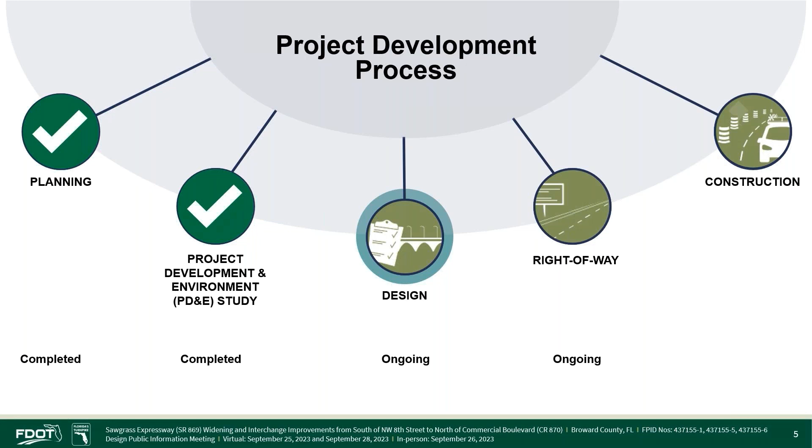The planning and the PD&E phases of the project have been completed, and the project is currently in the design phase. The design phase is when the construction plans and cost estimates to build a project are developed. The design phase is followed by right-of-way acquisition and construction. Right-of-way acquisition activities started in the first quarter of 2023 and are ongoing. Construction is tentatively expected to start in the first quarter of 2025.

This project, located from south of Northwest 8th Street to north of Commercial Boulevard, is adding capacity to meet future transportation demand and to improve safety. The project covers approximately 8 miles of the Sawgrass Expressway main line and includes 3 segments: Northwest 8th Street to Sunrise Boulevard, Sunrise Boulevard to Oakland Park Boulevard, and Oakland Park Boulevard to Commercial Boulevard.

Key improvements include widening from 6 to 10 lanes, interchange improvements at Sunrise Boulevard (County Road 838), Pat Salerno Drive, Oakland Park Boulevard (County Road 816), Commercial Boulevard (County Road 870), and a new interchange at Northwest 8th Street.

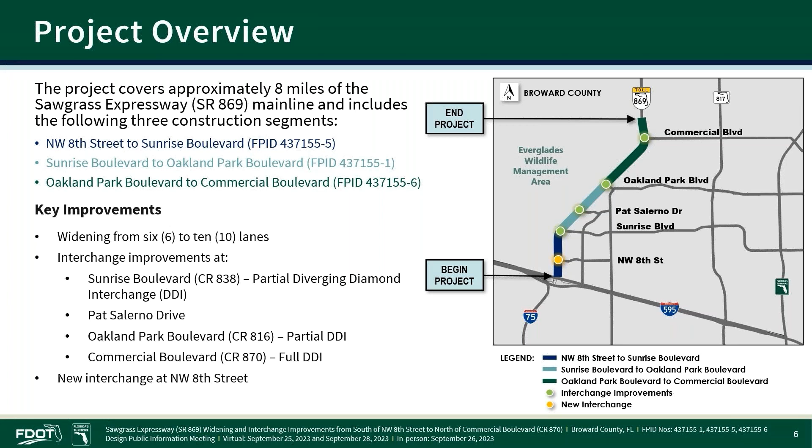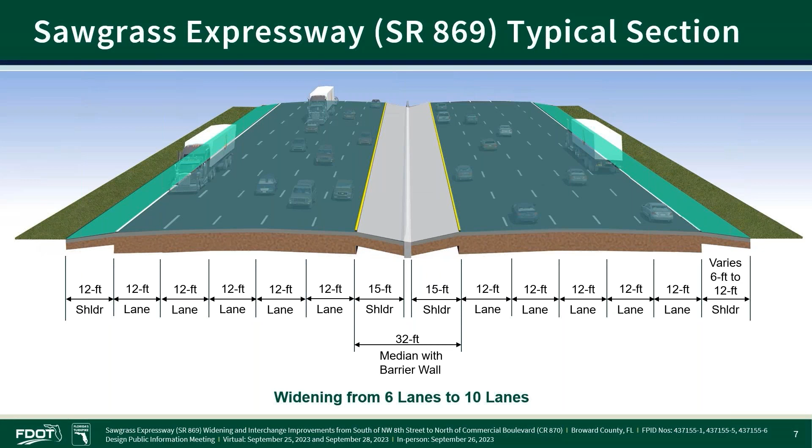The existing 6-lane Sawgrass Expressway will be widened to 10 12-foot lanes with 12-foot shoulders, and the existing grass median will be converted to a paved median with 15-foot shoulders and a concrete median barrier wall.

The following slides will highlight design features at Northwest 8th Street. Northwest 8th Street is a new interchange and a reliever for the Sunrise Boulevard interchange.

Additional improvements include a new southbound on-ramp toll site and a new northbound off-ramp toll site, and the addition of a new southbound CD road. Due to the high traffic volumes projected for this segment, the short weaving distance, and high vehicle interaction between the Sawgrass Expressway and interchanges, a unique expressway system within a system known as a collector distributor, or CD system, is required.

CD road systems provide lanes adjacent to the main freeway for entering and exiting, while moving vehicle lane changes off the main freeway and onto the CD road.

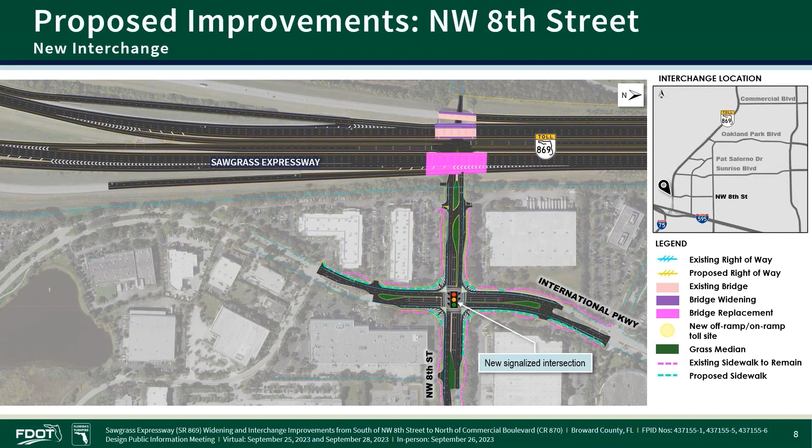Looking eastbound, the proposed roadway typical section along Northwest 8th Street beneath the Sawgrass Expressway new bridge overpass accommodates 2 12-foot lanes in the eastbound direction, and 1 12-foot through lane with left turn lane and 1 12-foot right turn only lane in the westbound direction.

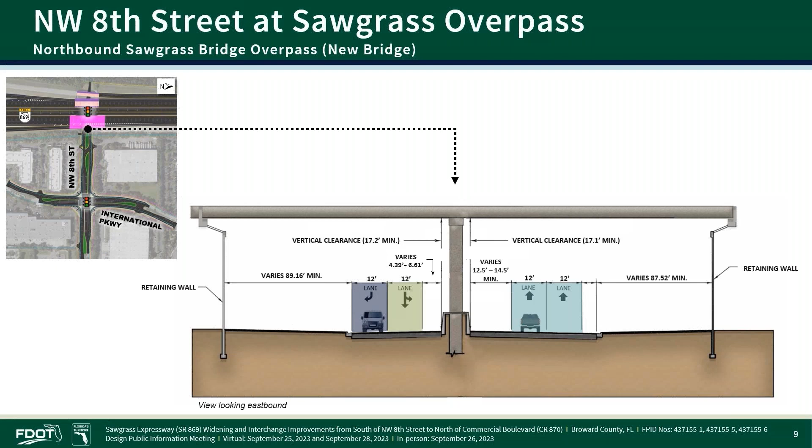In a partial DDI, traffic crosses to the other side of the roadway between ramps. The crossover point will be signalized to enhance safety and traffic flow.

Improvements also include a proposed pond on the west side of the Sawgrass Expressway, an exclusive auxiliary lane to Sawgrass Corporate Parkway, and traffic signal improvements at the Sawgrass Corporate Parkway intersection.

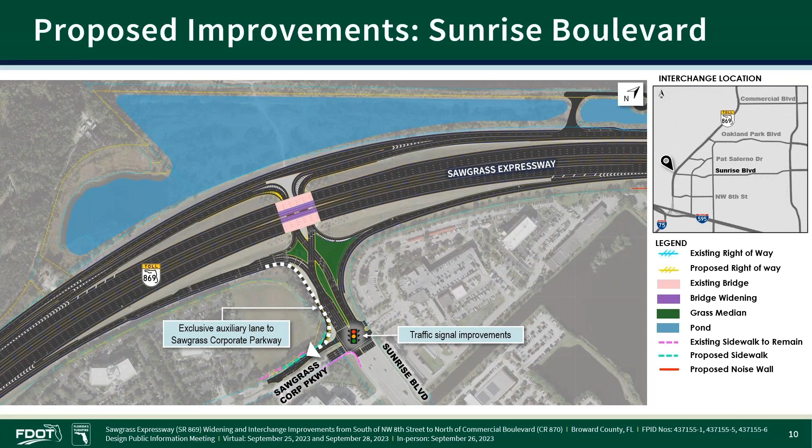Additional intersection improvements will include new ADA-compliant sidewalks, pedestrian signals, and crossings. Right-of-way acquisition is anticipated along Sunrise Boulevard. For additional information regarding right-of-way acquisition along Sunrise Boulevard, please view the exhibit boards on the project website.

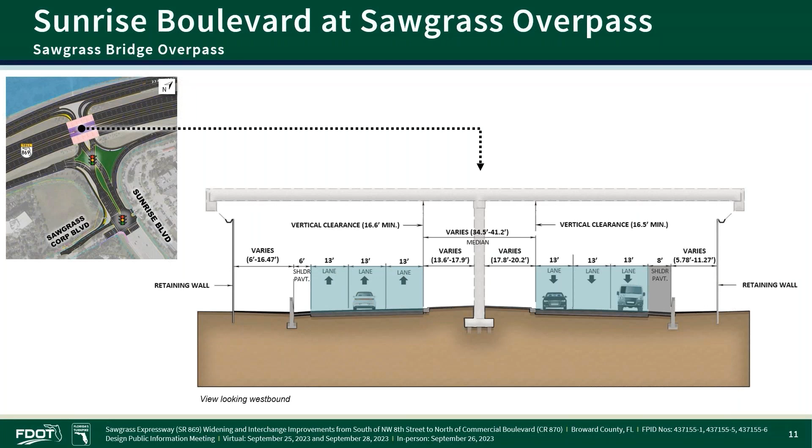Looking westbound, the proposed roadway typical section along Sunrise Boulevard beneath the Sawgrass Expressway accommodates 3 13-foot lanes and an 8-foot shoulder in the westbound direction, and 3 13-foot lanes and a 6-foot shoulder in the eastbound direction.

The following slides will highlight design features at Pat Salerno Drive. In partnership with Broward County, the interchange at Pat Salerno Drive is a full interchange which includes new ramp movements to and from northbound State Road 869.

Other improvements to the Sawgrass Expressway include a new southbound CD road and a new ramp connector to the CD road, a new westbound to northbound on-ramp, new mainline tolls in the northbound and southbound directions, new on- and off-ramp toll sites in the northbound and southbound directions, and a southbound CD road toll site.

Additional improvements along Pat Salerno Drive will include realignment of the existing pond, addition of bike lanes beginning at the FLA Live Arena parking entrance eastward to Northwest 136th Street, addition of an exclusive right turn lane to Northwest 136th Street, and traffic signal improvements at the intersection of Pat Salerno Drive and Northwest 136th Street.

Additional intersection improvements include new ADA-compliant sidewalks, pedestrian signals, and crossings. Additionally, intersection safety and operations will be improved by restricting left turn movements from westbound Pat Salerno Drive into the FLA Live Arena parking entrance adjacent to Northwest 136th Street.

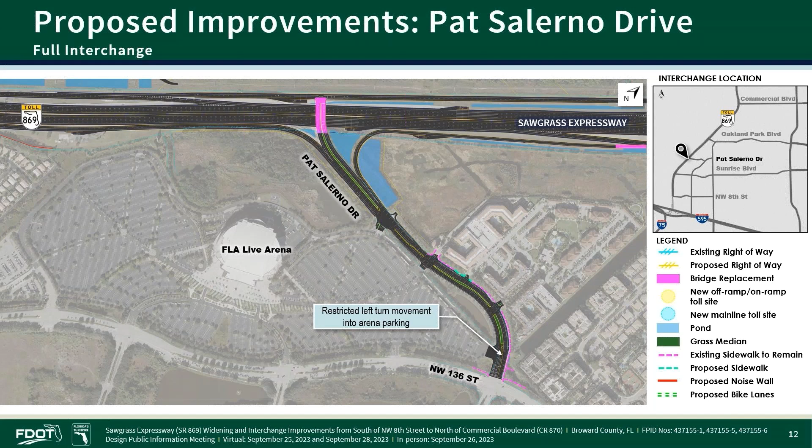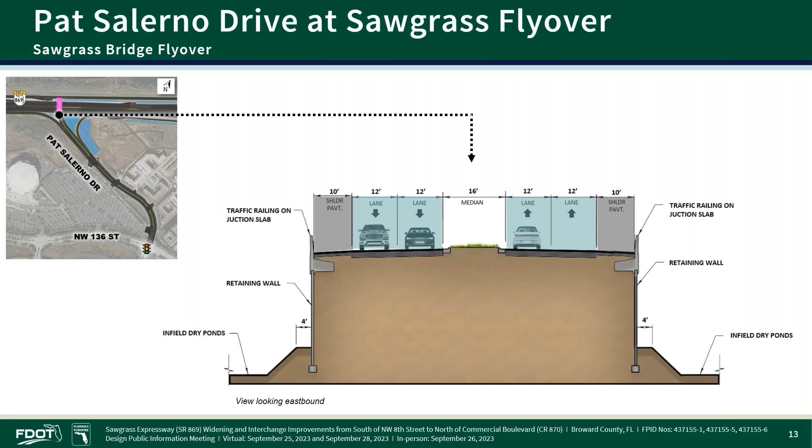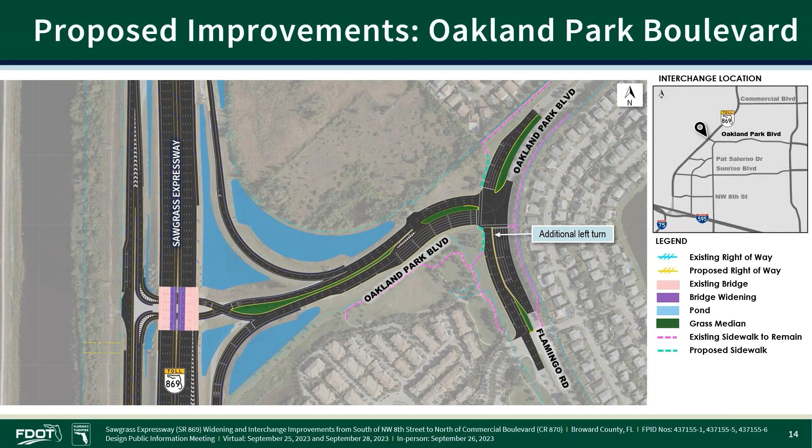Improvements also include additional left and right turn lanes and traffic signal improvements at Oakland Park Boulevard and Flamingo Road, and an additional left turn lane at Flamingo Road. Additional intersection improvements at Flamingo Road will include new ADA-compliant sidewalks, pedestrian signals, and crossings.

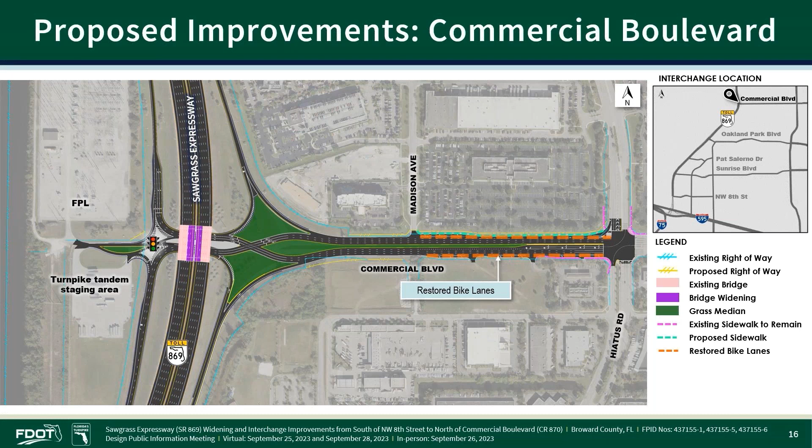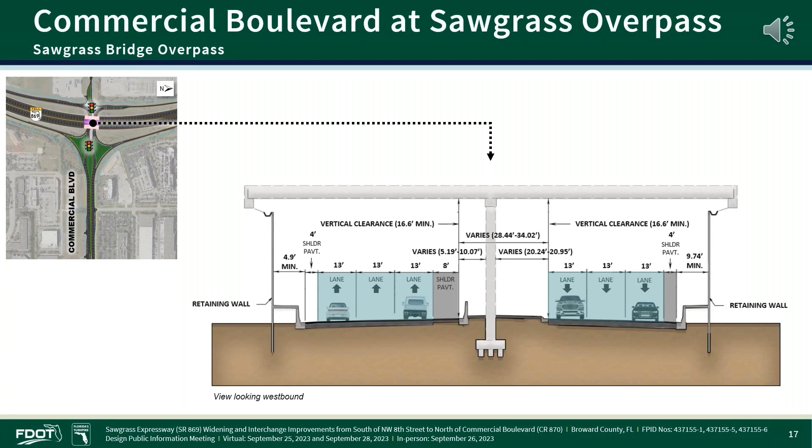Looking westbound, the proposed roadway typical section along Commercial Boulevard beneath the Sawgrass Expressway accommodates 3 13-foot lanes and a 4-foot shoulder in the westbound direction, and 3 13-foot lanes and an 8-foot shoulder in the eastbound direction.

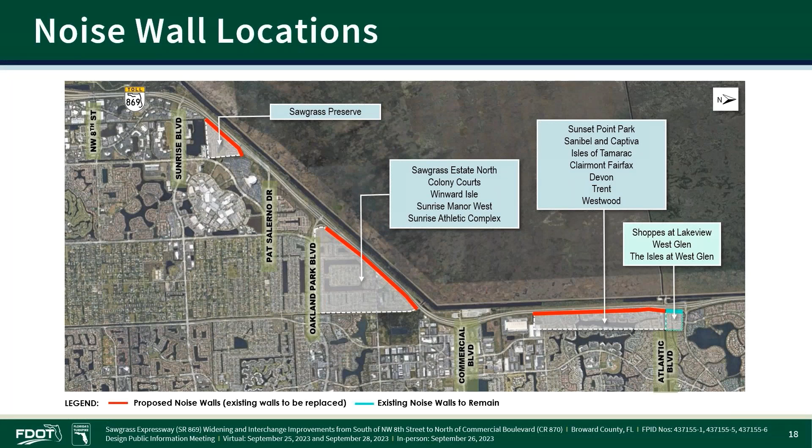If new noise walls are required, those walls will be constructed within the project. For more information regarding the noise wall evaluation process, please visit the project website to access the link to the Florida Turnpike's traffic noise video.

Right-of-way acquisition is anticipated along Northwest 8th Street, Sunrise Boulevard, Pat Salerno Drive, and Commercial Boulevard. No residential or commercial right-of-way relocation is anticipated within the project. All right-of-way acquisition will be conducted in accordance with Chapter 73 of the Florida statutes. We encourage you to call the Turnpike Project Manager if you have any questions regarding the right-of-way acquisition process.

When the project reaches the construction phase, signage will be placed to inform drivers of detours before work begins, and the enterprise will continue coordinating with local agencies, businesses, and the public during project construction through the project website, email, and newsletters.

Traffic will be maintained during construction to minimize disruptions to the traveling public. Construction along the Sawgrass Expressway, State Road 869, will occur in phases. Existing travel lanes will remain open during peak periods, and short-term lane closures will typically occur during off-peak hours.

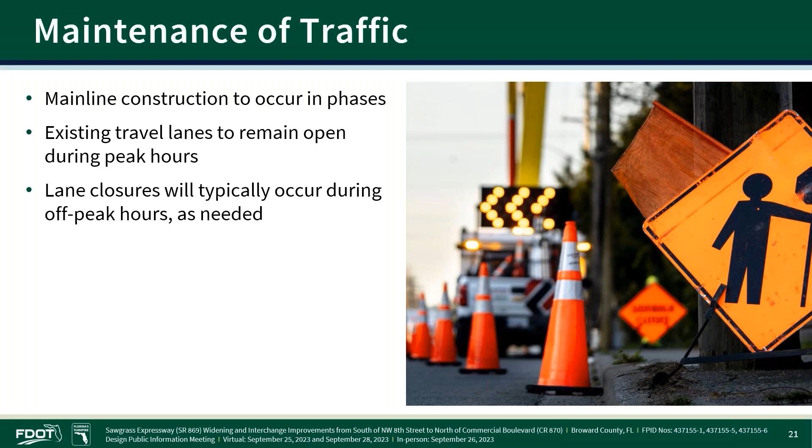The majority of the Sawgrass Expressway is located on the western fringes of the Broward County urban area and is designated as an evacuation route, providing connectivity to other evacuation routes such as I-75, the Florida's Turnpike Main Line, State Road 91, and I-95. Widening of the Sawgrass Expressway from south of Sunrise Boulevard to south of State Road 7 or US 441 was evaluated as part of a PD&E study.

The overall PD&E corridor improvements were presented to the public at a public hearing on January 17, 2017, and the State Environmental Impact Report, known as a SEIR, was approved on July 28, 2017. This project is currently in the design and right-of-way phases.

Corresponding interchange improvements will occur through a series of related projects, which include Atlantic Boulevard interchange, Atlantic Boulevard to Sample Road, Sunrise Boulevard to Oakland Park Boulevard, Northwest 8th Street to Sunrise Boulevard, University Drive to State Road 7, US 441, Sample Road to University Drive, and Oakland Park Boulevard to Commercial Boulevard.

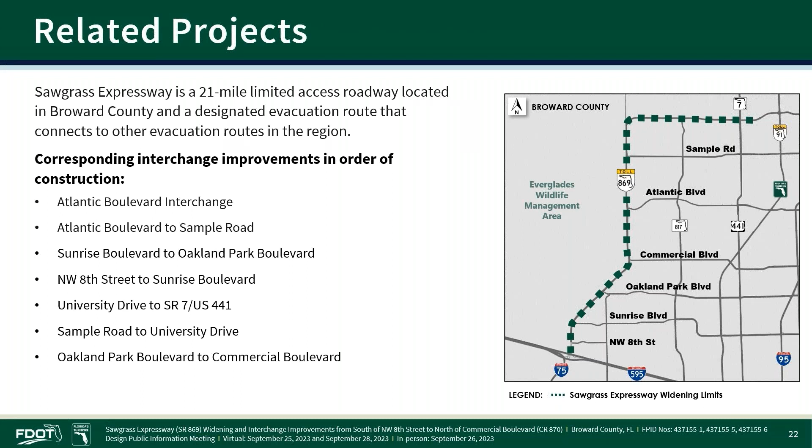The design phase, Northwest 8th Street to Sunrise Boulevard, will be completed by the third quarter of 2025, and construction will begin in the fourth quarter of 2025. The design phase, Sunrise Boulevard to Oakland Park Boulevard, will be completed by the third quarter of 2024, and construction will begin in the first quarter of 2025.

The design phase for Oakland Park Boulevard to Commercial Boulevard will be completed by the first quarter of 2026, and construction will begin in the third quarter of 2026. The right-of-way acquisition phase for all projects will be completed by the fourth quarter of 2024.

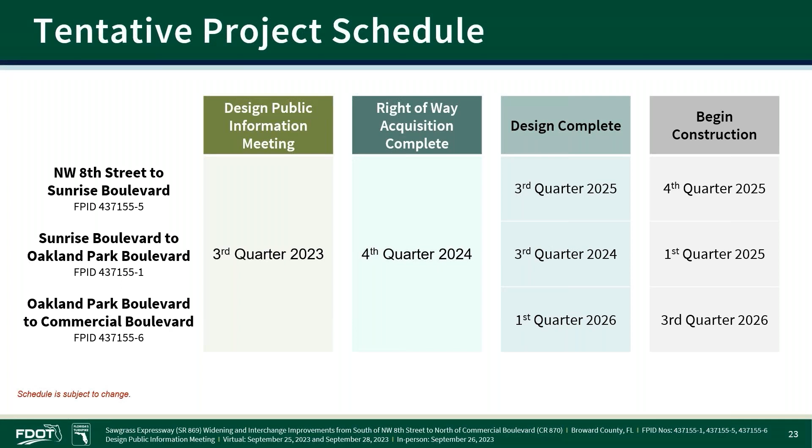Your questions and comments are essential to this process and will help the enterprise understand your concerns and suggestions for the proposed improvements presented. There are multiple ways to submit your comments to the enterprise.

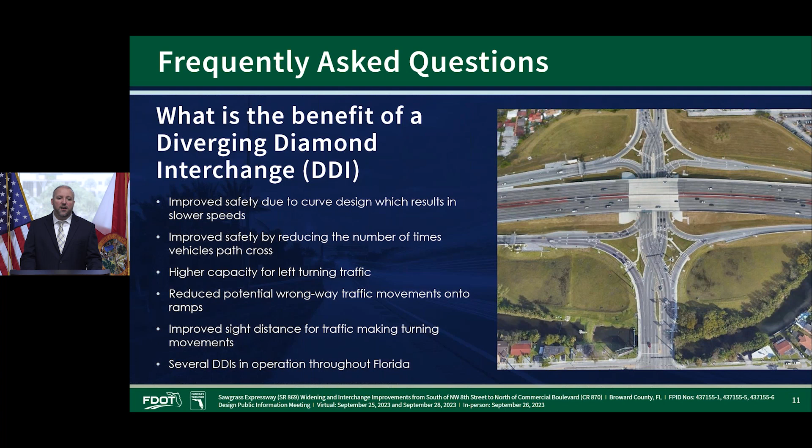The next question asks, are drainage improvements part of this project? This project does include drainage improvements in addition to the roadway and bridge widening. The proposed drainage improvements are being designed in accordance with all South Florida Water Management District and Florida Department of Transportation water quantity and quality criteria.

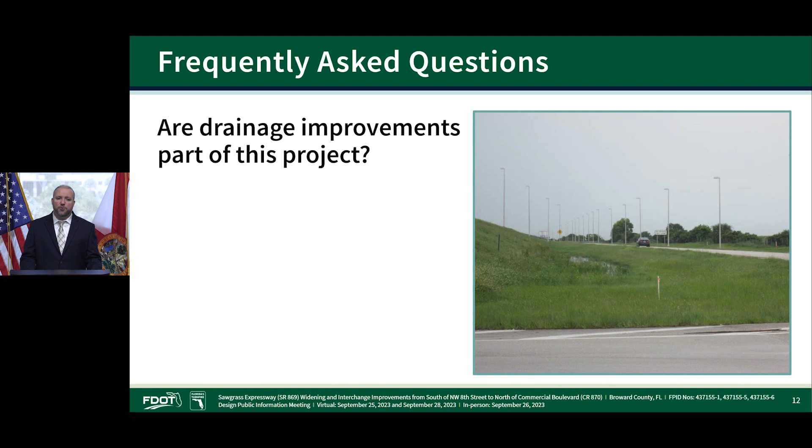The proposed improvements will provide the existing drainage systems with additional storage to accommodate the added pavement from this project. A South Florida Water Management District environmental resource permit will be obtained prior to construction.

Next, we are asked, what type of landscaping is planned for this project? The landscape design process includes what we call a landscape opportunity plan. These plans will identify areas where landscaping is potentially effective and viable within the project limits. Typically, landscape construction will begin 1 year after the roadway construction has been completed.

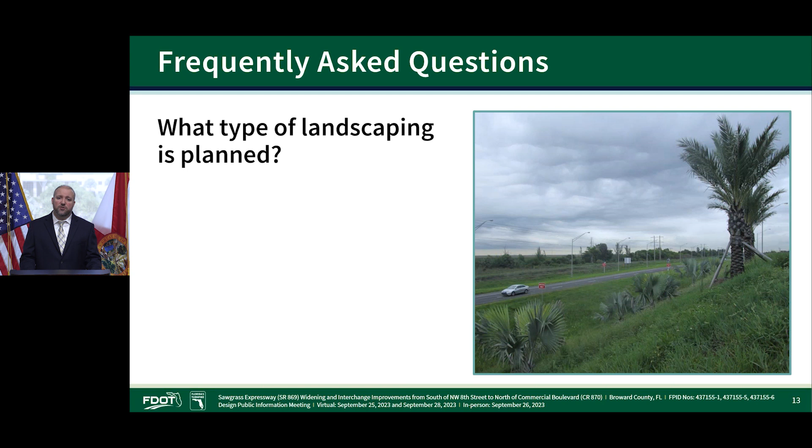And finally for today, the National Highway Traffic Safety Administration's Child Passenger Safety Week reminds us that keeping children safe extends far beyond car seats. We encourage you to visit www.nhtsa.gov/road-safety/child-safety for prevention tips and educational information.